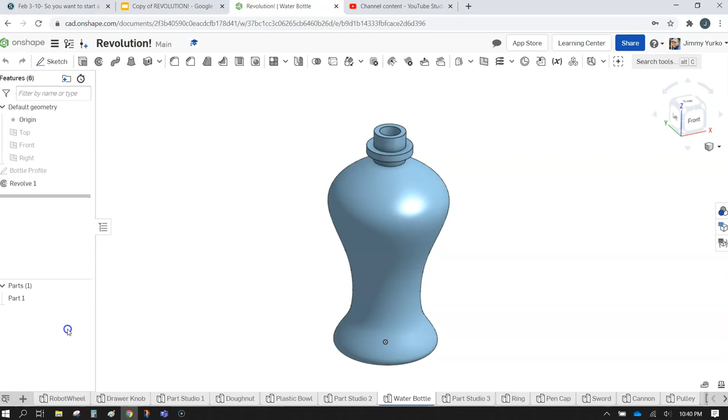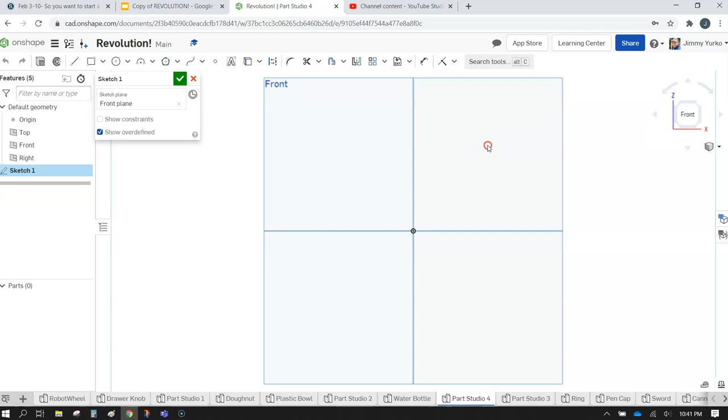So I'm going to go ahead and start a new part studio. And we'll go ahead and start a new sketch on the front plane. And go ahead and rotate the view so that we're looking straight on that front plane. So you can either click the N key on your keyboard or hit the front button on the view cube. I'm going to leave my planes on today for this activity.

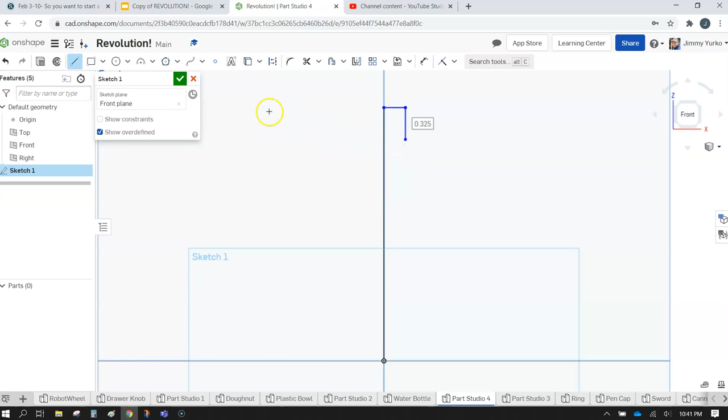We're going to go ahead and set a vertical line to serve as your central axis. And we're going to draw the neck of the bottle. And from this point on, we're going to use our spline tool to draw whatever profile you want for your bottle. And you can throw as many points as you want. Going to make a fun bottle, go for it.

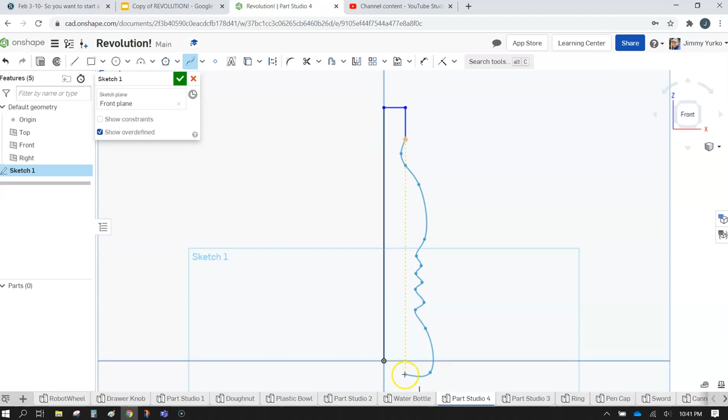So just do whatever you like here, and then create a foot around the bottle. Double click to finish it out. If you did the sketch correct, you should have that blue profile shaded in. I'm going to go ahead and give that a name. And hit that check mark to finish it out. So it's important we have the vertical line to start with, and then our profile.

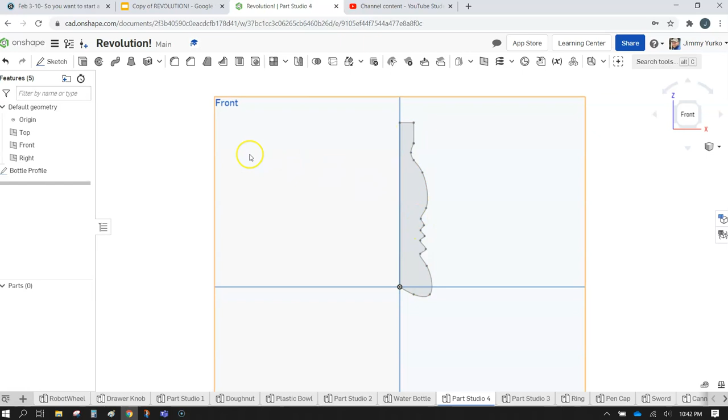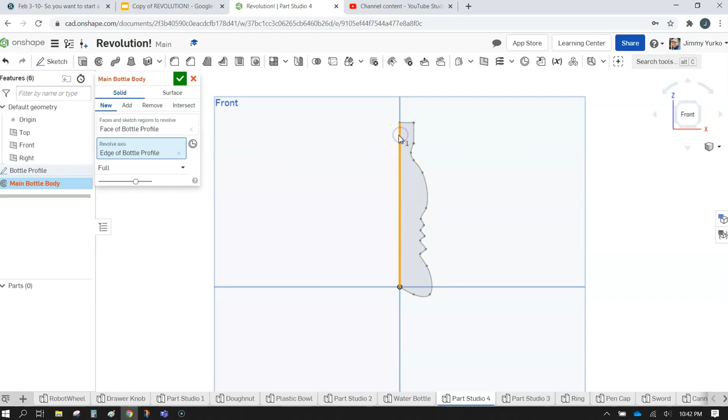We're going to go ahead and revolve that. Throw a name on it just so you remember what it is when you move on. I'm going to click the surface that we want to revolve, that profile, and identify the axis. That's going to create our bottle to start with.

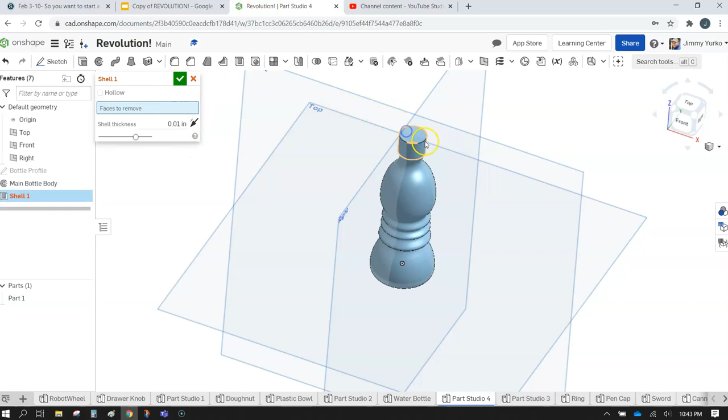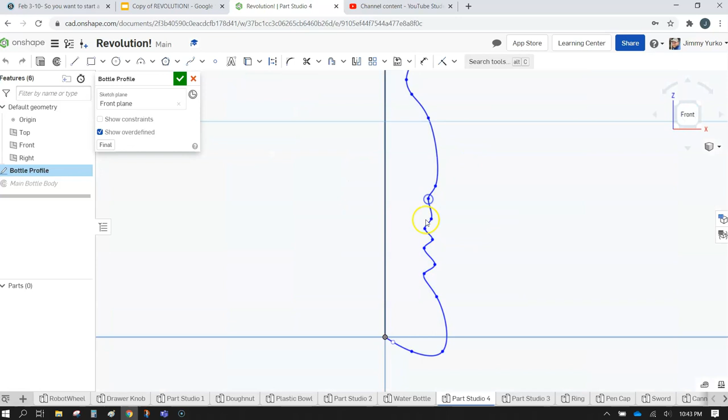If you get into a situation like this where it just doesn't want to shell, you can go ahead back to our main profile and see what caused that. Most likely, if it chooses not to shell, it's because you have too sharp of curves in your profile. So I'm just going to make this a little smoother. And then update. So this time I've got a little smoother profile.

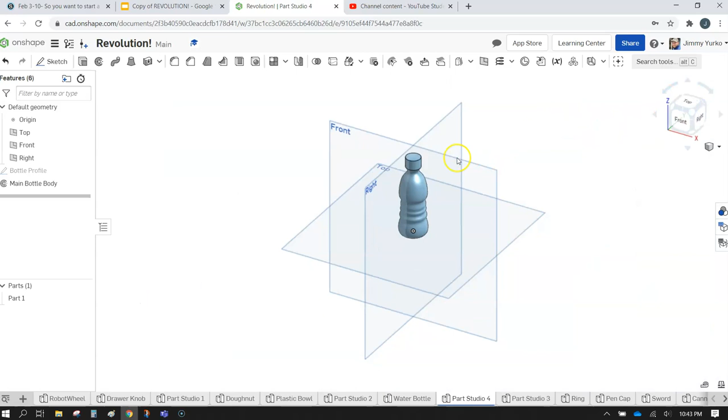Let's go ahead and hollow that out. There's my shell tool. Click on the top. And you see that worked pretty well. I don't need it to be 1/10 of an inch thick. That's pretty darn thick. So go with 5/100ths. And there we have it. Now we have a hollow bottle, which you can see.

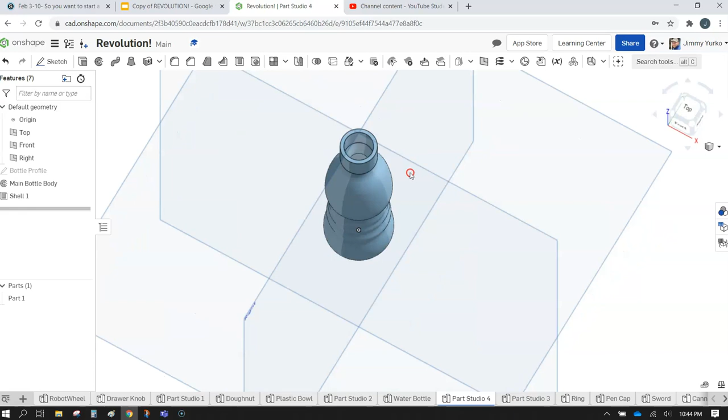And let's go ahead and put a ring around that bottle. So just like we did with our first revolution, we're going to go ahead and create a new sketch. We're going to create it on the front plane, just like first time. This time all we're going to do is add a rectangle. And we're going to add that rectangle so that it touches the existing bottle and comes out just a little bit.

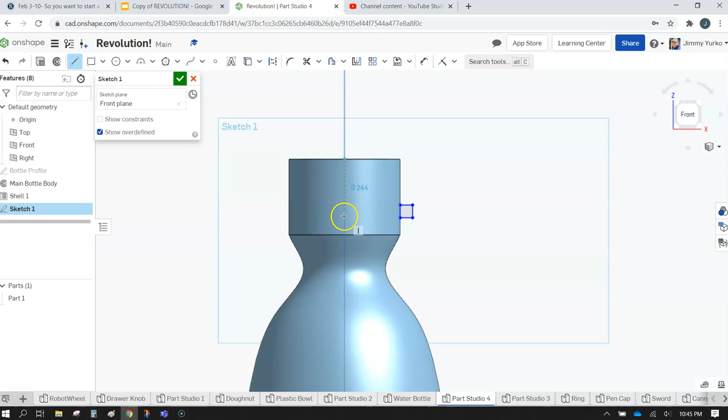We still need an axis to revolve around, so I'm going to go ahead and take the line tool and we're going to find the midpoint for the axis and the center line here. So here we are on our y-axis, and we're just going to draw a vertical line and hit the finish button. It's time to revolve. So we have a profile and an axis.

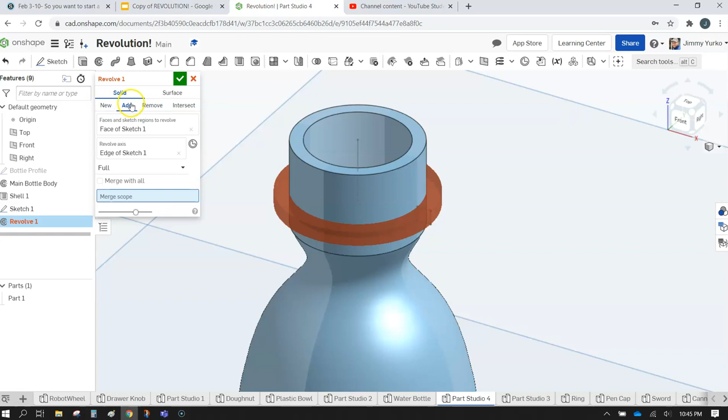There's the revolve tool. Identify our profile, identify our axis, and we're going to make that one part. So use the add button. Oh, sorry. Yeah, add. And oh, we ran into a problem. Let's find out what happened.

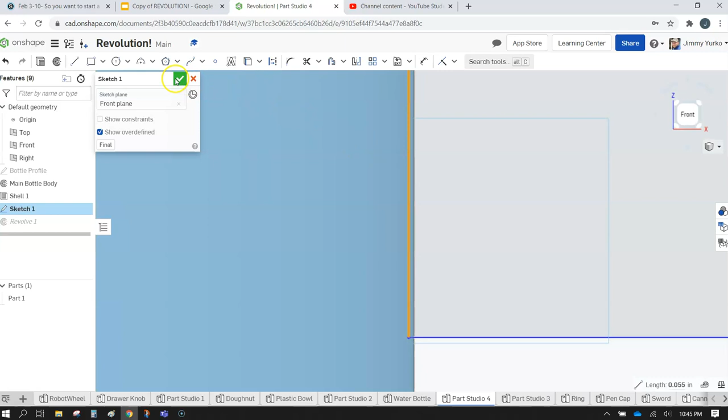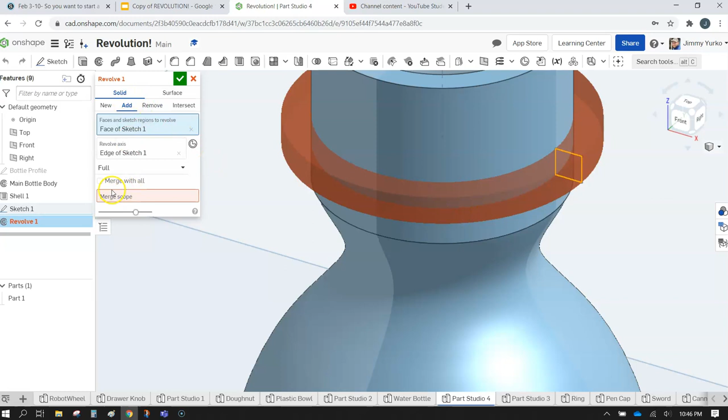Take a look at our front view. Make sure, oh, here we go. Why didn't that work? Because we weren't touching. So fix that up. Again, hit that revolve. Identifying the profile. Oh, looks like we never finished the first revolve, so we're going to cancel the second revolve. Double click to get back into it. Hit that merge with all. And there you have it.

So there's a demonstration on a water bottle, including a couple of errors that you may run into. So if you want to go ahead and create yourself a water bottle, those are the basic steps and some corrections to common errors that people run into.